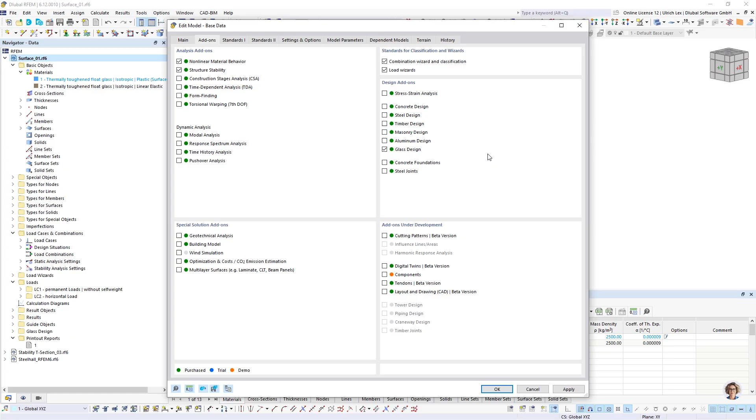So take a look at the base data. Today I have activated the add-on nonlinear material behavior, the structure stability, and for design, the glass design, because it's created in material glass.

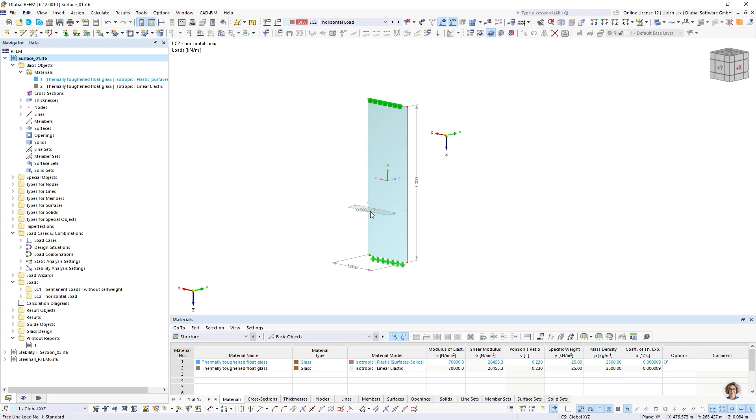So what do I want to do today? I have this system supported in the upper line and downside, and I have two different load cases. One load I created as a permanent load. It's located in the upper line, and the other load is a horizontal load, maybe from people or anything else.

So what I want to do today is to look how much I can increase the load so that the stability is given for this system. Here I can easily use the add-on Structure Stability. So, one short look back to the theory.

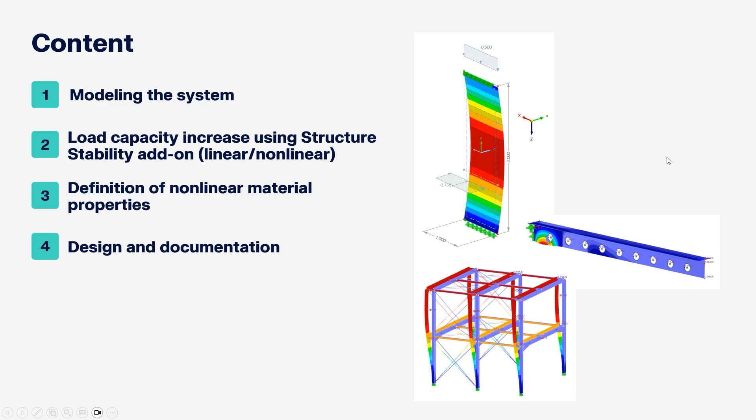Because we can do this also in the theory. I can compute here my critical buckling load, maybe also with formulas. As I told you, the height or length of the system is 3 meters, the width is 1 meter, the thickness of the surface is 12 millimeters. Material is glass, and the E-modulus is 70,000 Newton per square millimeter.

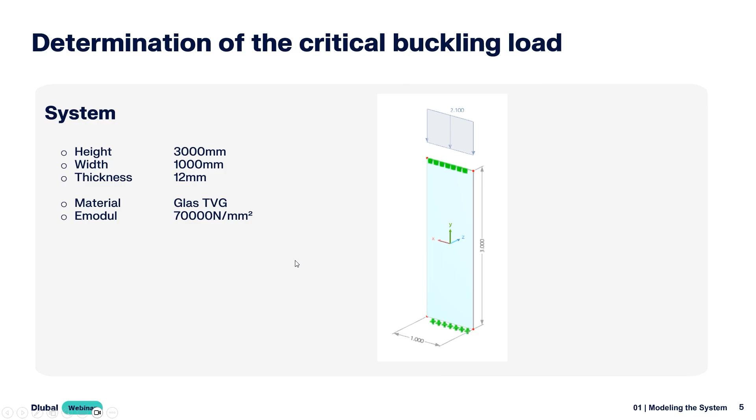So when we take a look at the formulas, we can use the Euler formula. It's called Fk equals pi squared multiplied with the E-modulus, divided by the buckling length squared. In our case it's a pendulum. It's case 2, where the buckling length equals the length of the system.

So when we fill the values in the formula, we get a theoretical critical buckling load of 11.05 kilonewton. This can be easily checked with RFEM too. So go back to the program.

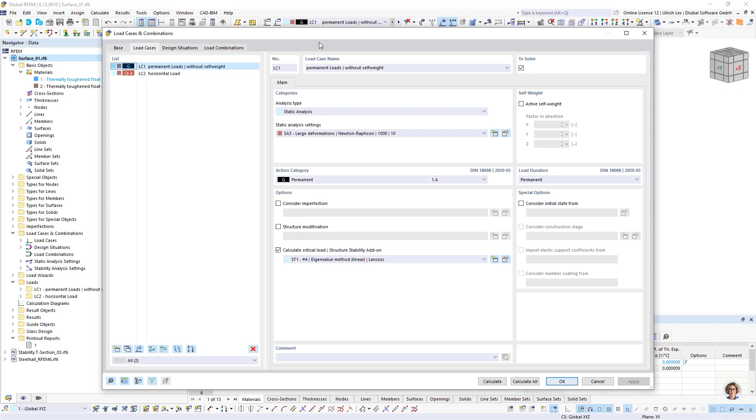How can we do the settings? If the stability analysis is checked on in the base data, then you get a new entry in load cases and combinations for the stability analysis settings. Here you can find these settings. You can also assign it directly to a load case or even to a load combination. It's possible for all load cases and combinations.

Here I can check on the structure stability add-on and create new settings for it. When I create a new setting, I have the possibility to use different analysis types. On the one side, the eigenvalue method, or for nonlinear things, the incremental method with or without eigenvalue analysis. In the first step, I want to use the eigenvalue method.

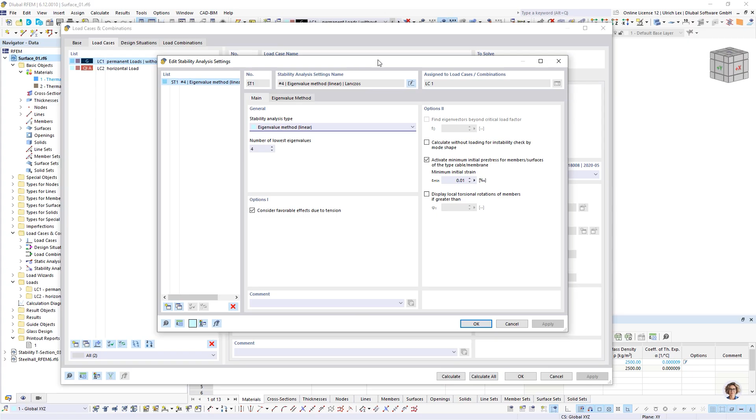And here in the settings I have the possibility to use different methods. You can find in the manual what is the best setting. So this is all I have to do in the settings. I can continue with OK. I want to use the permanent loads. It's without self-weight, so that I can compare it better with my analytical solution.

If we have checked this on, we can calculate the first load case. So you see in the calculation dialog that at first the load case is computed, and as a second step the stability analysis is done.

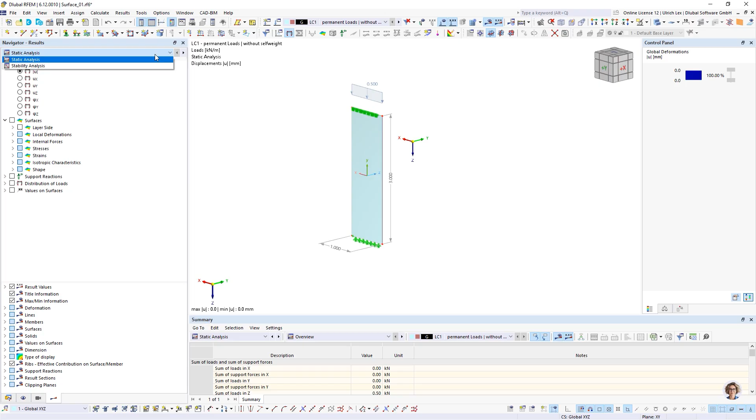You find the results are not here in the dialog on the upper side. You find the results on the navigator, one time the static analysis results, and if you click, you can choose the stability analysis results. The same is in the result table. Here you have the results for static analysis and stability analysis.

So when we take a look at the results, we find critical load factors. The critical load factor means the factor how much I can increase the given load until the system gets unstable. In our case, the first critical load factor is 22.264, and with this factor, I want to switch to my PowerPoint.

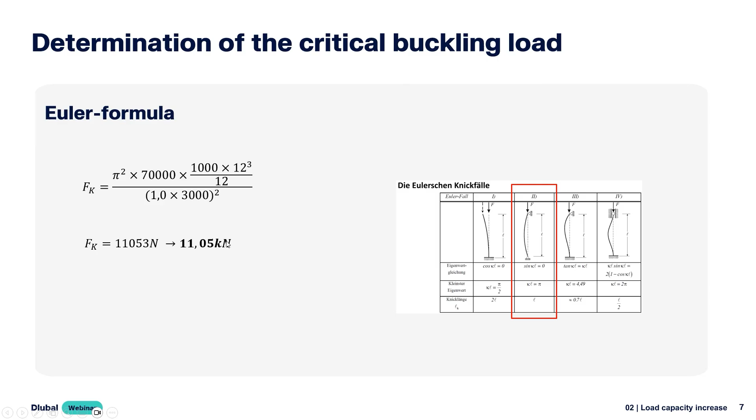So manually, we computed 11.05 kilonewton. What does RFEM do? With RFEM, we computed a critical load factor of 22.264. Our load was 0.5. That means I get a critical load, a critical buckling load of 11.13 kilonewton. So we see it's nearly the same as the formulas. And in this way, we can check the results of RFEM.

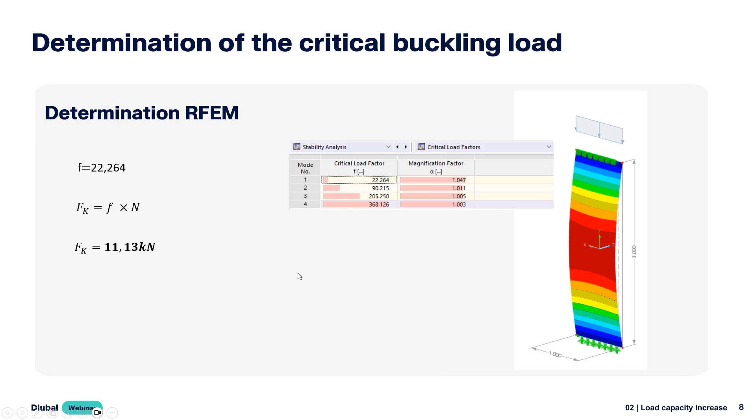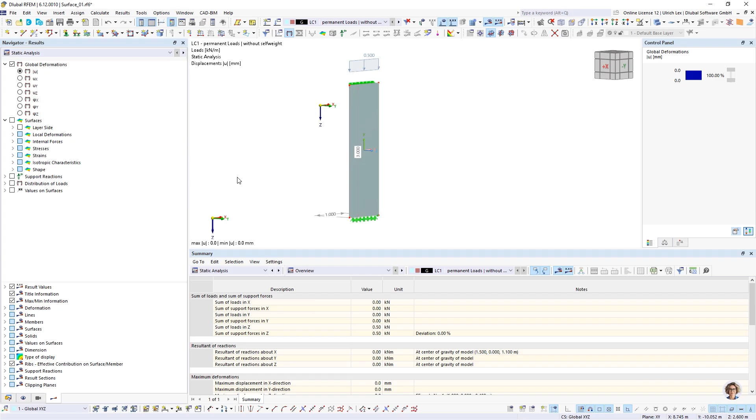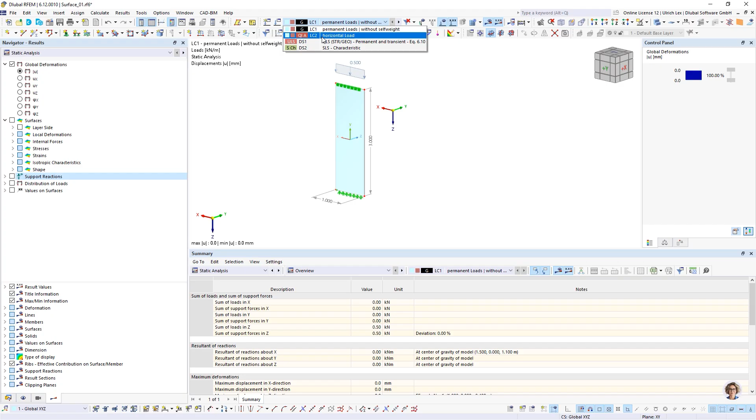Okay. So the load itself we can also show. I'll show you later the support reactions. Okay. Now we have done the eigenvalue. So as the second part, I can increase this load because I want to know how much I can increase my load with the vertical load and the horizontal load. How can I do this?

Before I do this, one topic: I use here for the analysis settings the large deformation calculation, because it's a special thing for glass. For the large deformation analysis, the membrane stiffness of the surfaces is activated. This is important for thin surfaces. With bending, it's not so important, but here it's important to get the system stable, because here the normal forces are acting also for the bending moment.

You have to know it, because when we increase now the load for the horizontal and the vertical situation, then it happens that the system gets big normal forces, and it's caused by the large deformation analysis. So okay, when we now want to take a look at both load cases, we create a new load combination. I use here also large deformation analysis. I assign my permanent loads and my horizontal load. I can check on the structure stability.

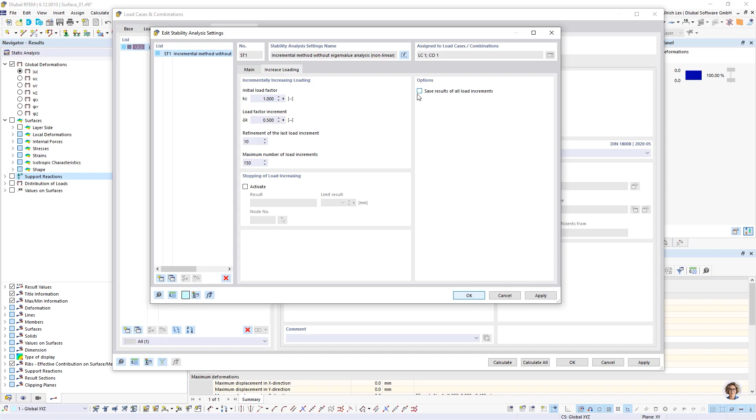The refinement of the last step is when the program finds the maximum load, then it goes one step back and does the steps with refinement to get more exact results. One important option is here on the right side. You can save the results for all increments. If you do not check this setting, then you get only the last load step. If you have checked it, you can take a look at each load step the program computes. So with this setting, I can continue with OK and compute my load combination.

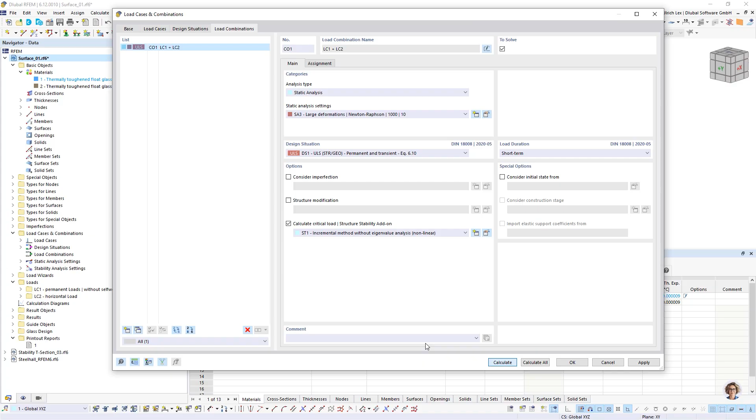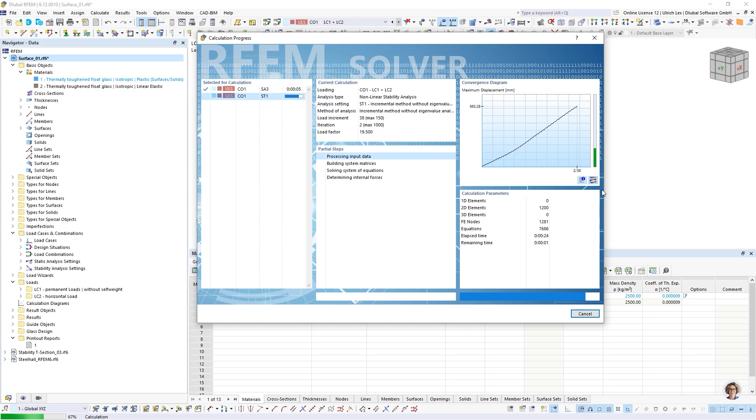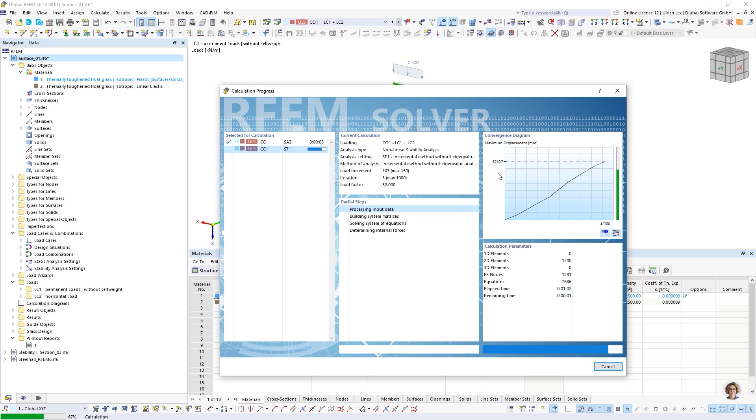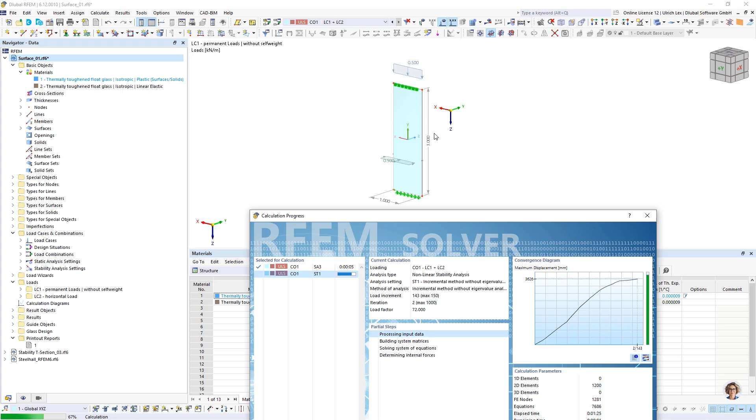Now I'm using a linear elastic material and use both loads. As I said before, the static analysis is done, and as a second part, the stability analysis. Here you can take a look at the deformation in each increment and at the calculation. Okay, we see the displacement gets higher and higher, and this is what I told before. It's because the large deformation analysis is activated: because of the horizontal load the system is bending, and the membrane forces are acting. So this system is acting in tension and not in bending. This is a special thing for glass structures. It would not happen when the thickness of the surface is bigger.

So now the calculation stops, and we will take a look at the results. We can see that the calculation stops in increment 150. We get a message that this is the load factor when the maximum number of increments is reached, from the setting before. That means the calculation is not really finished, because if I allow more increments, the program will compute more. For our case, it's okay, because when I look at the deformation in increment 150, I have about 3 meters deformation.

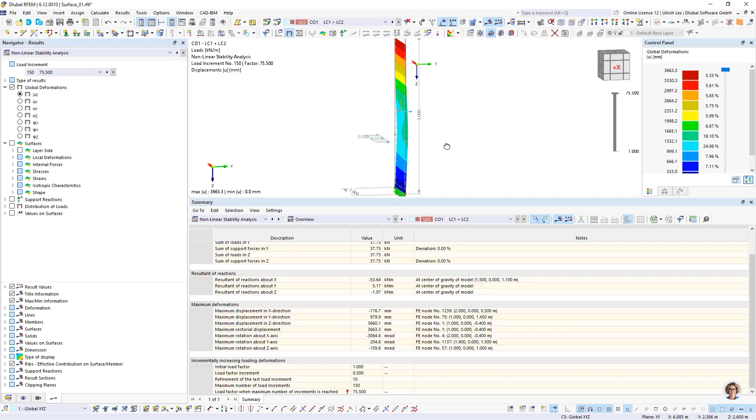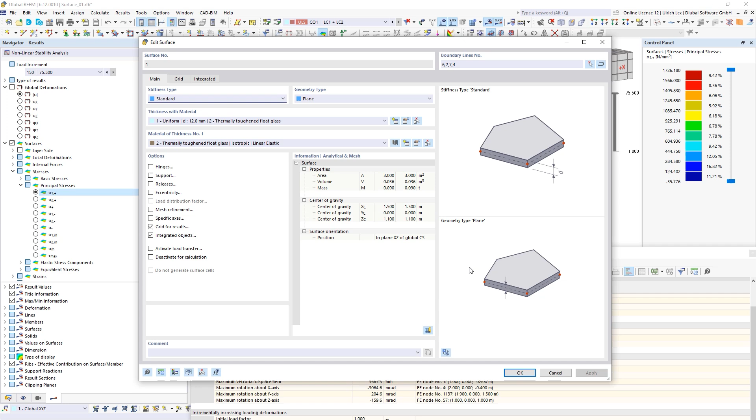So it's not usable in this case. But what I want to show you now is the stresses of the surface. I can take a look at the principal stresses, maybe sigma 1. For this glass, I know the allowable stress is about 80 Newton per square millimeter for a thermally toughened float glass. So now I can take a look at the stresses in each load step. I can scroll down and see my maximum stress is 80. I'm here on 6.56.

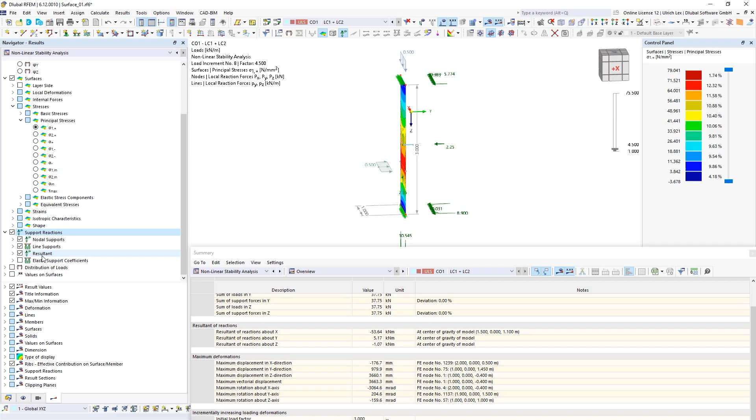Here at load step 4.5, I reached a maximum stress of 80 Newton per square millimeters. And now I can take a look at the support reactions. When I take a look at the resultant, we can see that the vertical load and the horizontal load are increased in the same way. So my original load 0.5 and the load factor 4.5 give a vertical load of 2.25 kilonewtons.

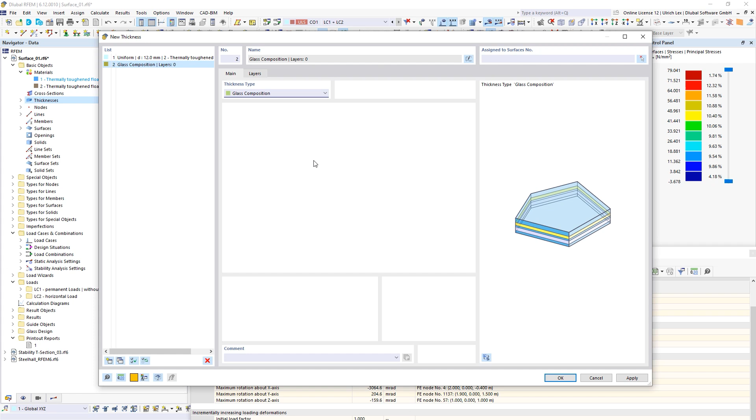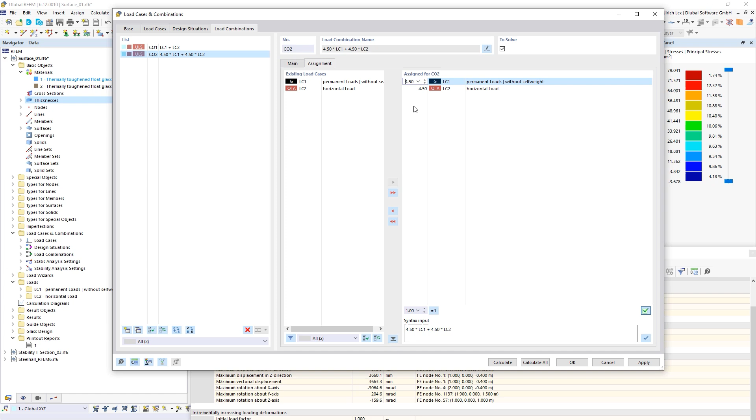So now I can do a simple check. I can create a glass surface, maybe a new thickness, as glass composition. I'm using the same thickness. It's only to be able to design it. I create a new load combination with the load factor 4.5. Okay, and now I can design this structure with the load of 4.5.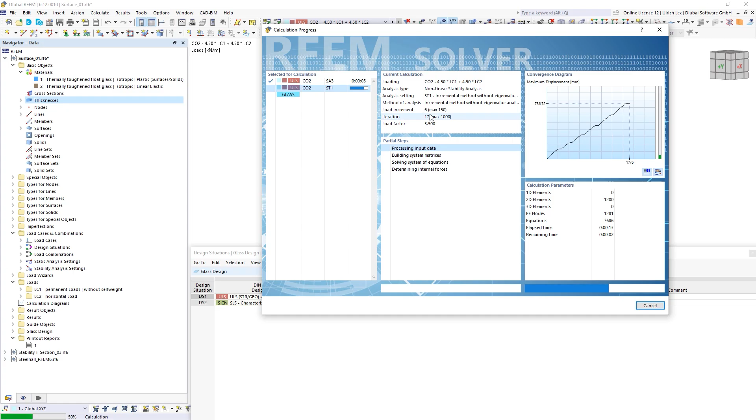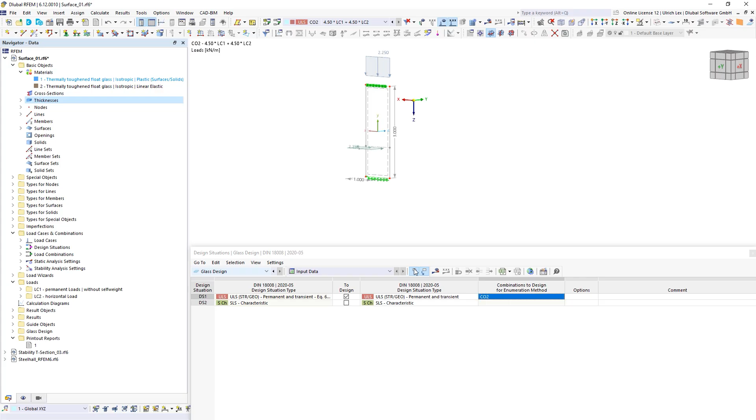When we are right, then we should have... I did the stability analysis again. It's not needed. But okay, I can stop it here. Yes. Okay, and deactivate it. And run the calculation again. Then there's no stability analysis. So when the calculation is ready, we see that the design ratio is nearly 100%.

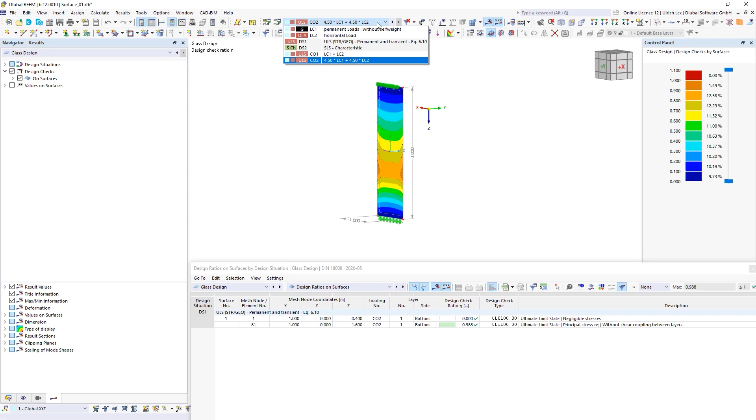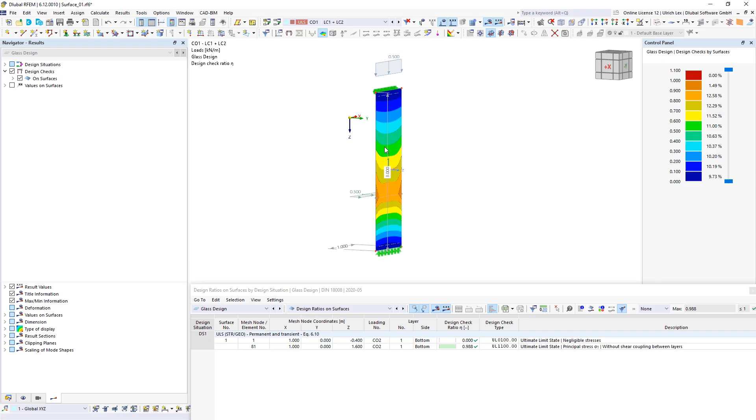So this is an easy way to find how much I can increase the load for this system. So now we increased the horizontal and the vertical loads in the same way. This is maybe not the case, or not needed each time. Maybe it's needed that I only increase the vertical load, or only the horizontal load, and this also can be done with the add-on.

The second part I want to change is the nonlinear material behavior. I assign at first my thickness of 12 millimeters and use the nonlinear material. For the nonlinear material, I created also a material type class. I use the isotropic plastic material model, and I used the stress failure hypothesis of Drucker-Prager. The most known would be von Mises, but with von Mises I can set only one value for tension and compression strength. With Drucker-Prager, I can define two different values for compression and tension.

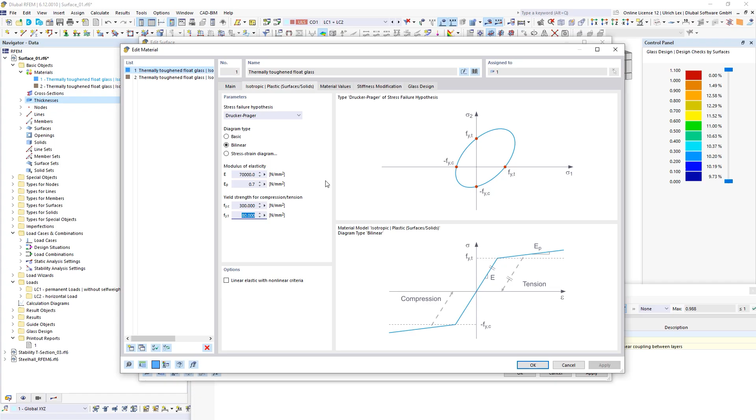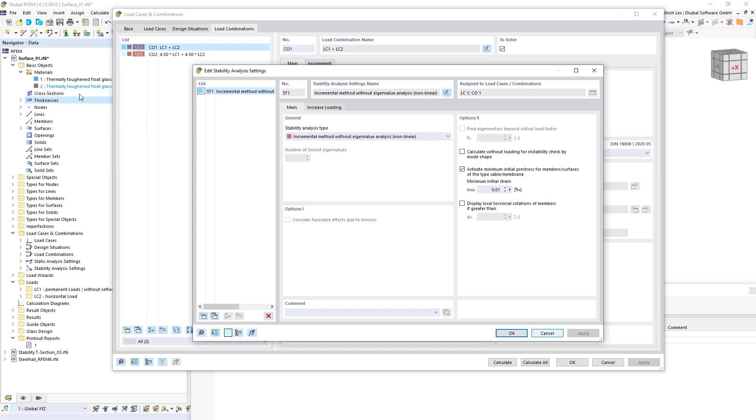The glass material has a very high compression yield strength, so I set 300, and for the tension, as I said before, I used the 80 Newton per square millimeters. So when I define this and use the stability analysis, the add-on increases the load until the point where the 80 Newton per square millimeters strength is reached, and then the calculation is stopped. Of course, we have to think about whether my material really has a plastic behavior or not. But I think it's a good way to get a feeling for how much I can increase my load.

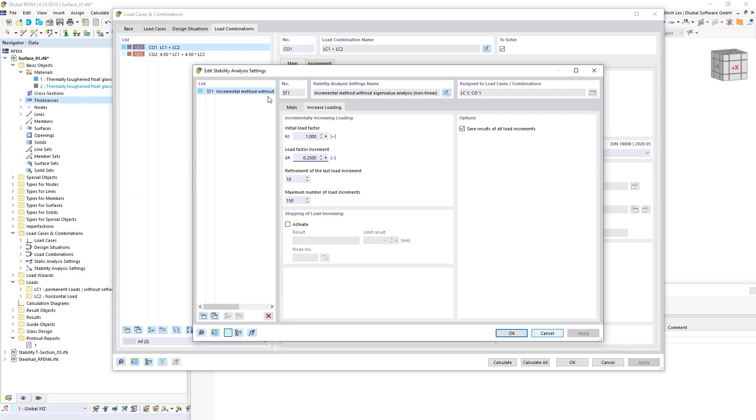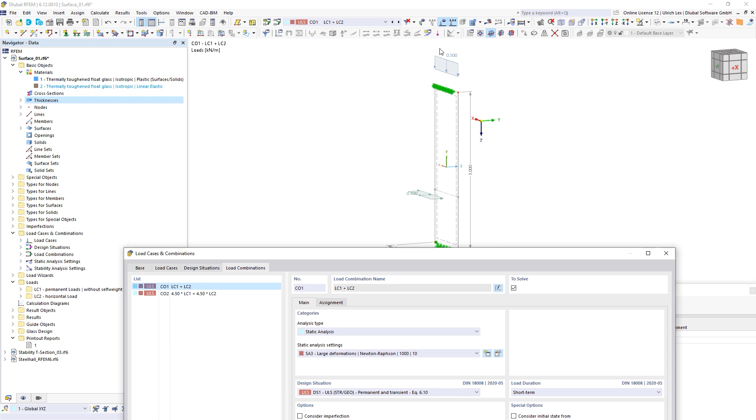I can do it a little bit finer, I would say. Okay, and now the settings are done. As a second step, I want to show you that I only want to increase my vertical load and keep my horizontal load fixed. I can do it when I use the initial state. Here I use load case 1 and load case 2, and as my initial state load case 2 should act. That means my load case 2 is always on the same level, and I increase only my load case 1.

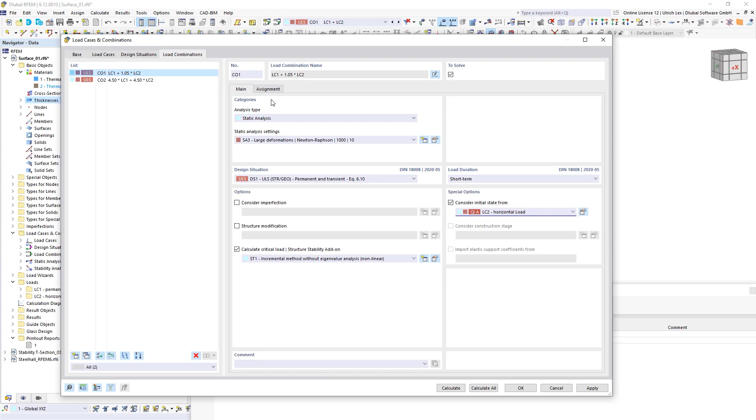You have to be careful because the load case 2 used here for the initial state has to be the same as the assigned load case. When I use any load factor here, then I would have to create a new load combination where I have this load factor too. But in our case, I use 1.0, so it's okay. So what happens when I now compute this?

In the calculation dialog, you see at first load case 2 is computed, then the combination: the static analysis for load case 2, the static analysis for the combination, and after that the stability analysis of combination 1 is done. So now we see the calculation is running and the calculation stops before our 150 increments.

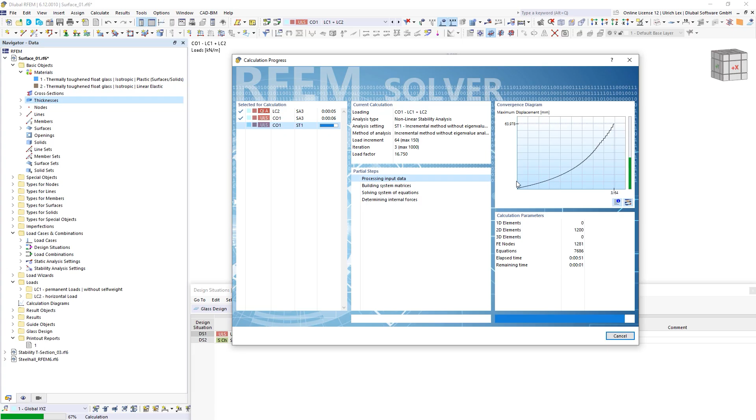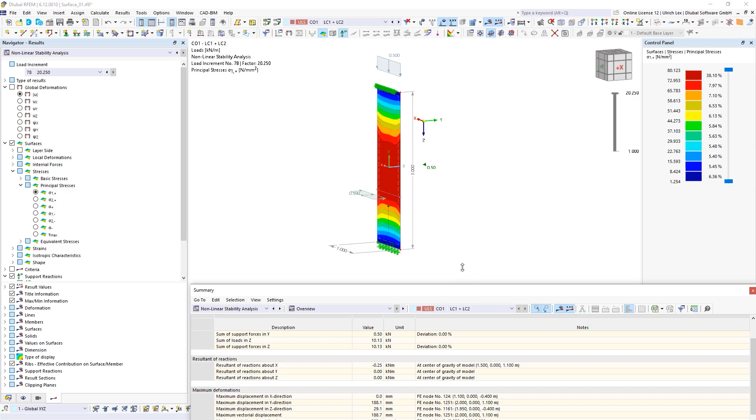So now the calculation stops at about a load factor of 20, and when we check the stresses, then it is exactly the stress we have set. Here the stress is 80, a little bit higher, because the nonlinear setting uses equivalent stresses for checking the results, so it's a little bit higher. But I think for what we want to do, it's enough.

So now, what does this result say? The results say, okay, we can increase the load about 20 times before a collapse of the system is given. When we now take a look at the support reactions, we can see that the horizontal load is the same with 0.5, and only our vertical load is increased about this 20 times.

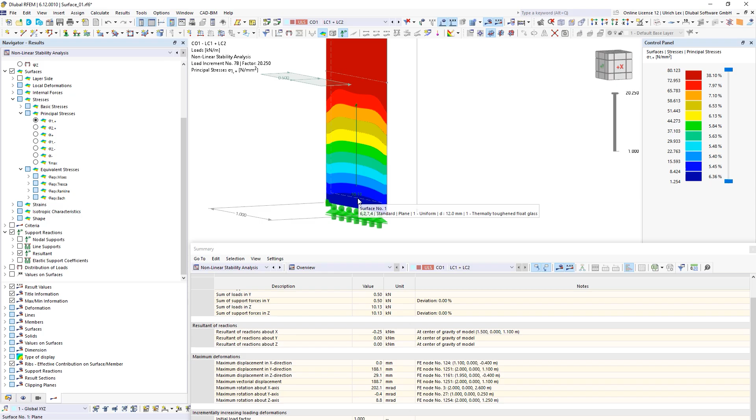So this is a possibility. You can check how much you can increase this load. You can do the same in the same way for the horizontal load. You can say, okay, my vertical load is fixed, and I only want to increase my horizontal load until the system is unstable.

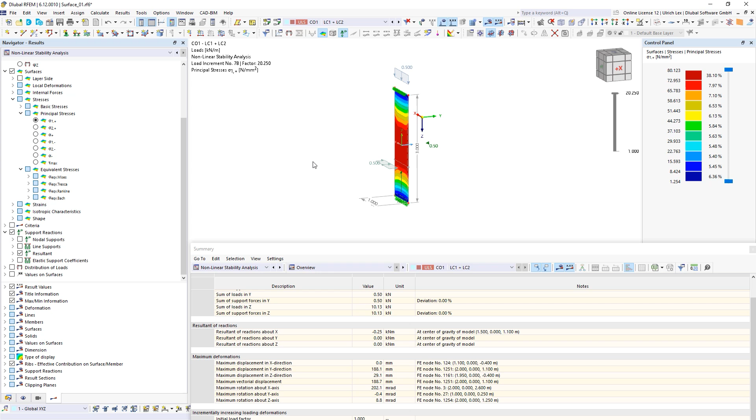So as a last step, I want to take a look at the deformations. The stresses maybe would be okay for a design, but the deformations are about 190 millimeters. It's quite high, I think. So what can we do in the stability add-on? We can say, okay, stop the calculation when a wished height of displacement is reached.

So we have here a length of maybe 3 meters. When I say, okay, 3000 divided by 100, it's about 30 millimeters, where I can allow the deformations. And this setting we can do in the same way here for increasing loads. We can activate the stopping of load increasing. We can use here the deformation in the different directions.

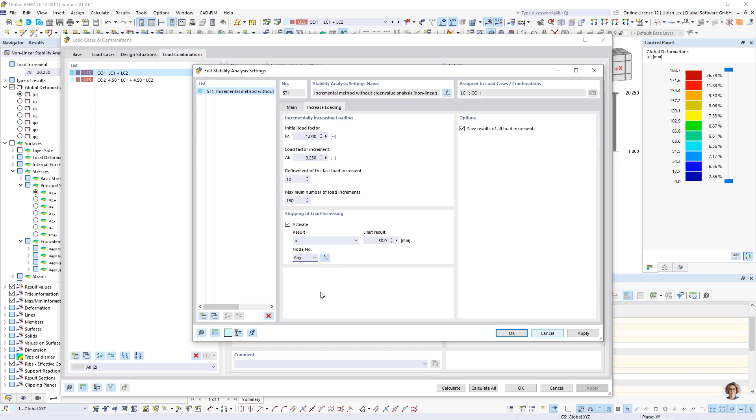And we can define a value. Maybe I define here 30 millimeters and can say, okay, one exact node has this deformation, or I can say the maximum deformation of the whole system is not bigger than this value. When I continue with OK, we can see that the calculation is running and the calculation should stop at 30 millimeters.

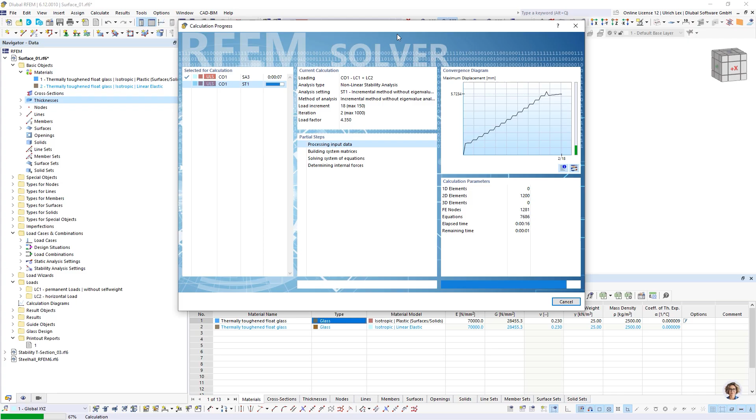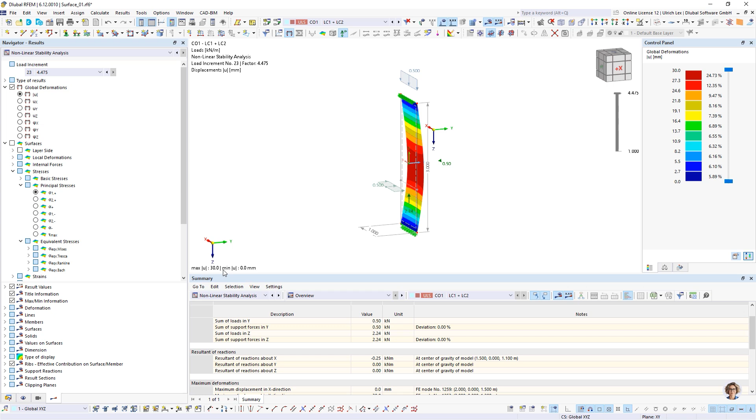So when I take a look at the results, I see that my load factor is 4.4. Here I get a deformation of maximum 30 millimeters. And my stresses are even smaller. So with these settings, you can find out how much the load increasing can be done. So now I want to stop here and switch to a second example I've prepared.

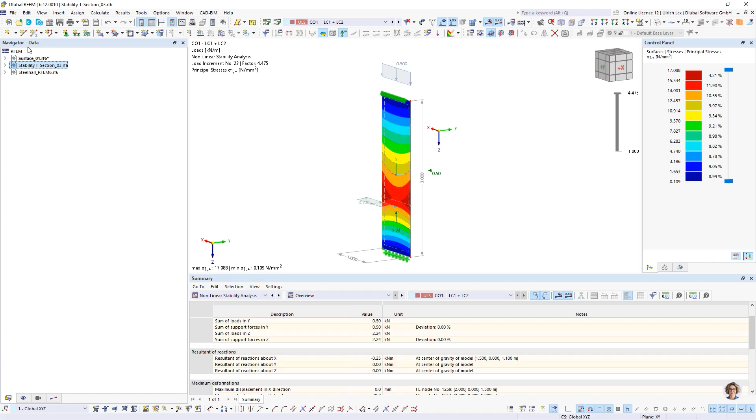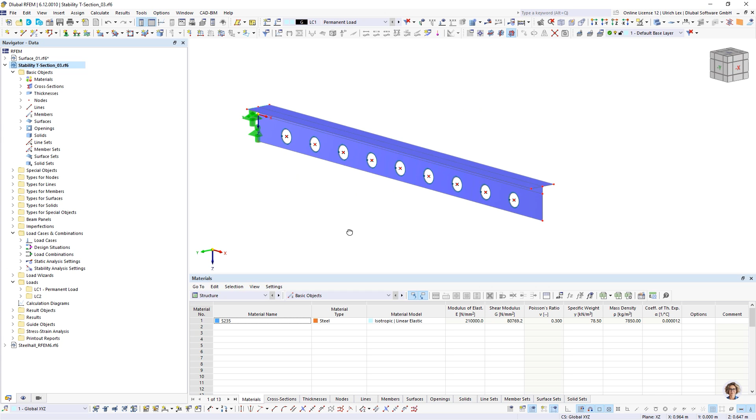It's an analysis of a section, of a T section. This T section is created as surfaces, as two surfaces. A special thing of these sections are these openings, these holes. And here I want to do a design and also a stability check for it. So we have on the one side the loads, a permanent load, and in this case a snow load.

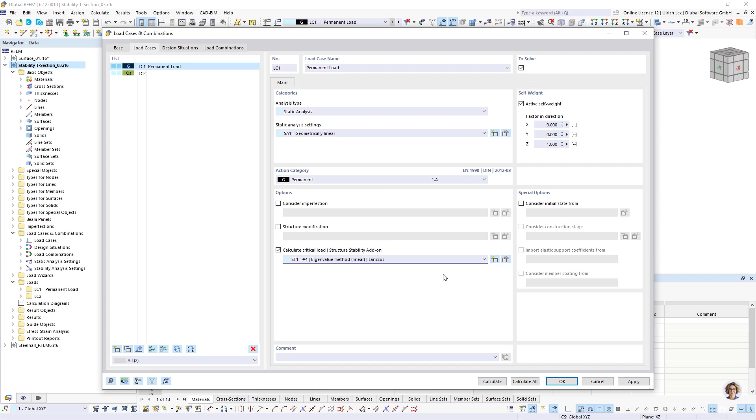Now I can also activate here a stability analysis, and I want to get also the eigenvalue method with the same settings as before or with the default settings, and compute this eigenvalue for this cross section.

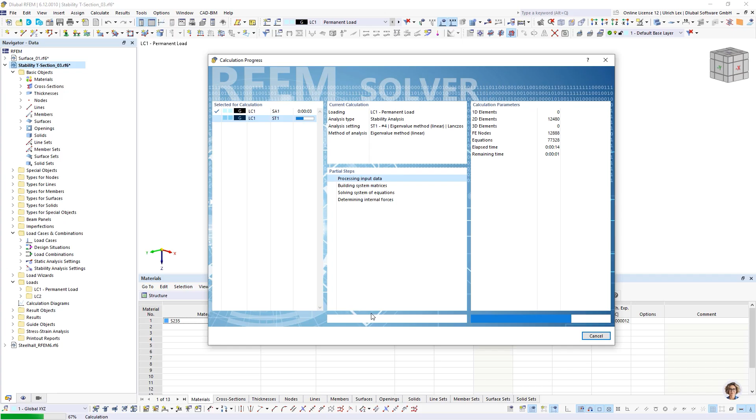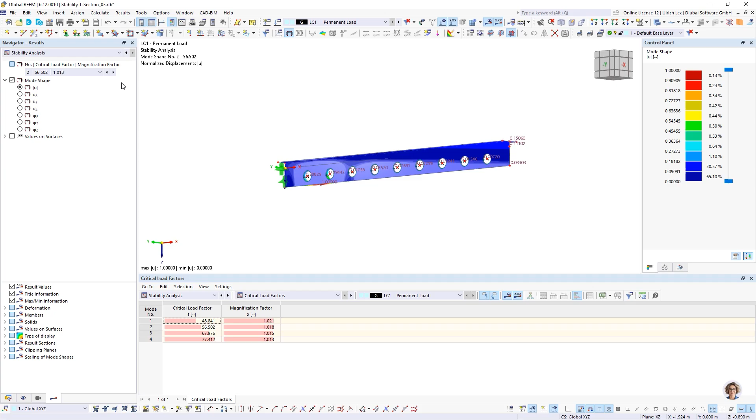So what are the results now? For the results I get also the critical load factors, and I get the different eigenforms for these systems. When we take a look at the second eigenform, it's a buckling on the second part. The first eigenform is the buckling on the first part, and so on. So this eigenform we can now use for a design of this section.

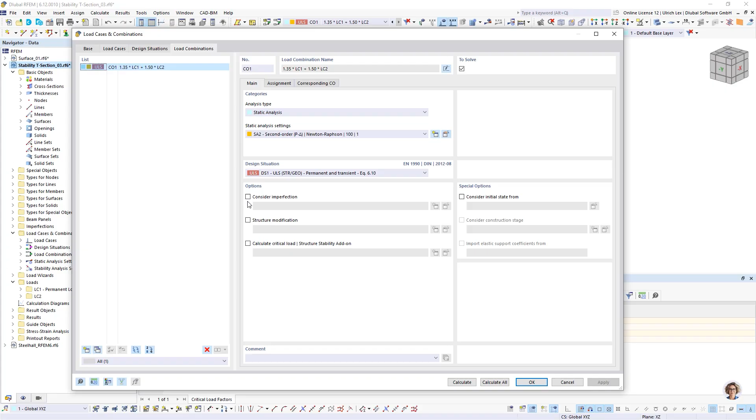When we want to design the load combination, then we can do it here. We can consider an imperfection. We have to create a new imperfection. We have to choose here maybe the buckling mode. I want to select a load case. I want to use the buckling mode from load case 1. And here, as we saw before, the eigenform 1 we want to use.

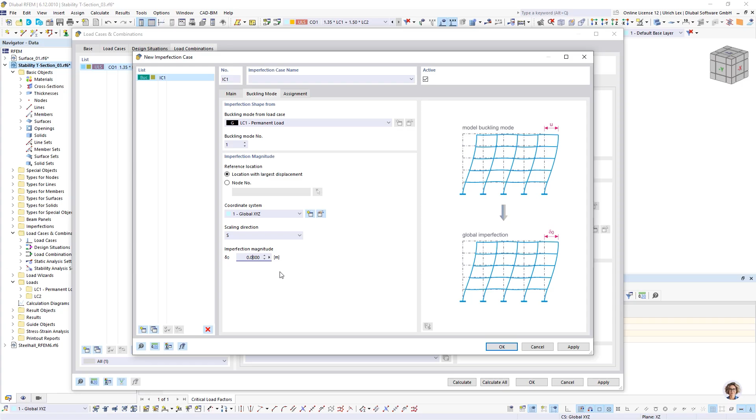Here I have to say how the scaling of the imperfection is. I can say, okay, it's in direction of the eigenform, and I want to define a height of the imperfection. That means when I go back to my load case 1, I got this eigenform, and I say now for load combination 1, it should use this form as an imperfection, and the value of 3 centimeters, 30 millimeters, should be here at this point. And the rest of the points are scaling automatically.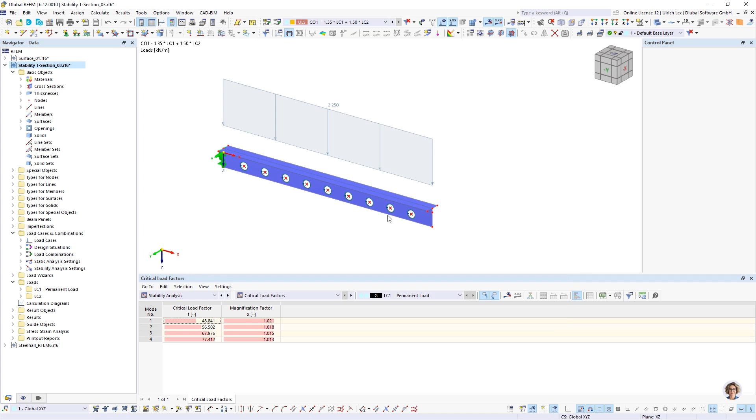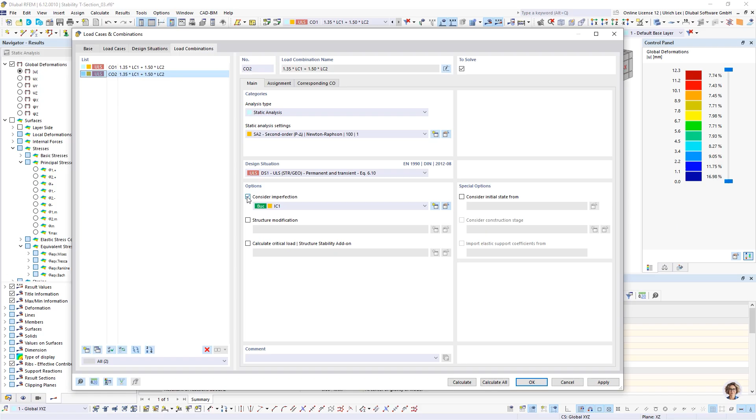So when I did these settings, I can compute the combination again. And we see at the deformation that this curve of the imperfection is assigned. To compare briefly, I can create a second combination where I do not use the imperfection. Here I get much lower deformations and much lower stresses.

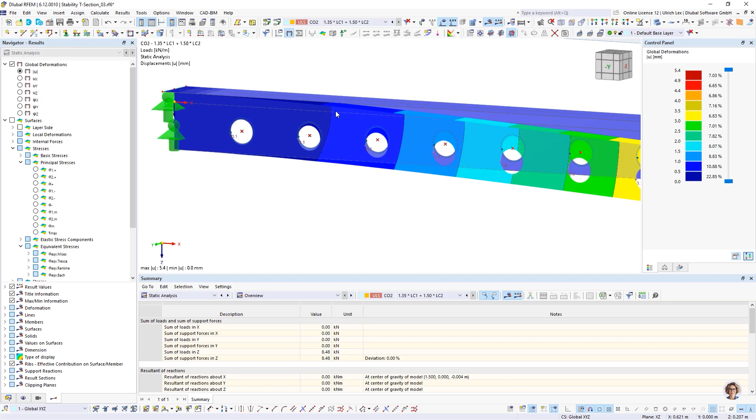So exactly here you have the perfect form. And in the first case, you can easily consider these local imperfections for the system. So this is a good point how you can use this stability analysis.

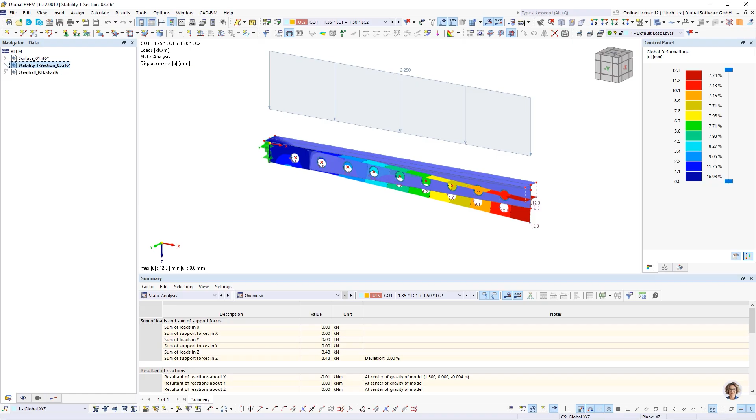As the third part, I want to show you something for members. I created here a steel hall with permanent loading and imposed loading and so on. But my problem now is that I get an instability when I compute even the permanent loading.

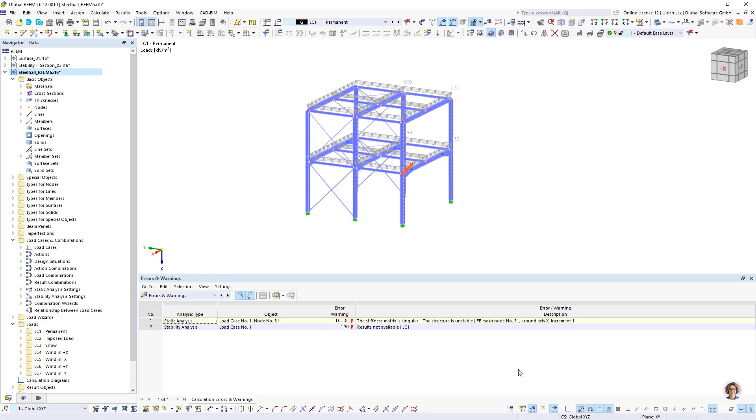So this can happen when I do a bigger modeling and so on. I get this error message. The calculation says the stiffness matrix is singular, it's unstable on this point. When I take a look at this point, it seems everything is okay.

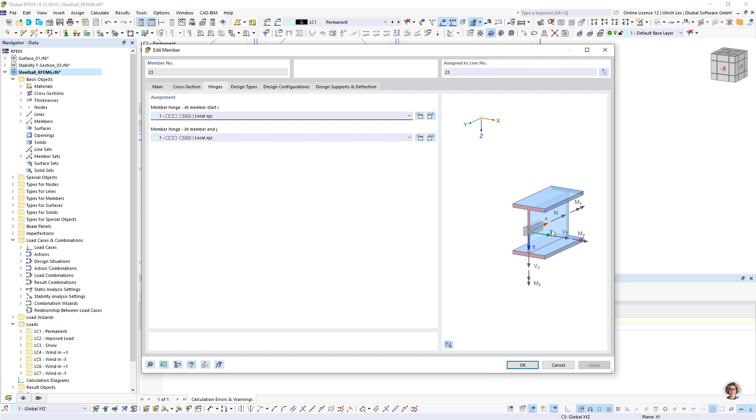Here I have maybe hinges. It's a member type beam, okay, with hinges, but the hinges are around Z and Y, so it should be okay. And for this case, I can also use the stability add-on.

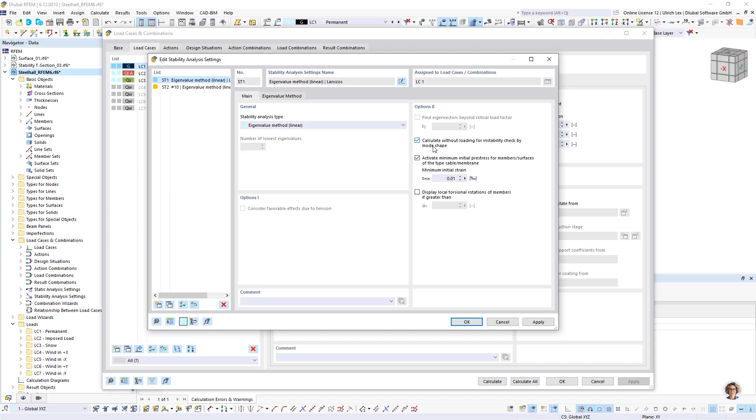I can here create a new setting where I say, okay, I use the eigenvalue method and I want to calculate it without loading to check the mode shape. When I check on this and run the calculation again, then I get results for a geometric instability of the system.

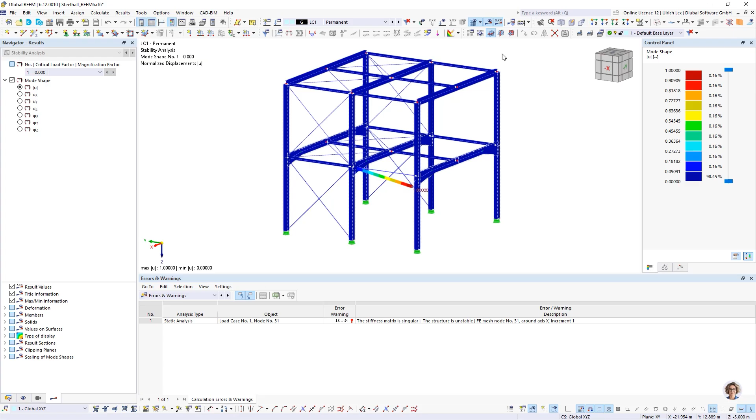I would say for this easy system, it's easier to find the instability. When the system gets bigger and bigger, it's more difficult. And here this option is very good, because now I see, okay, on this point there is the instability. It looks like this member is not connected to my column, and I can check it afterwards.

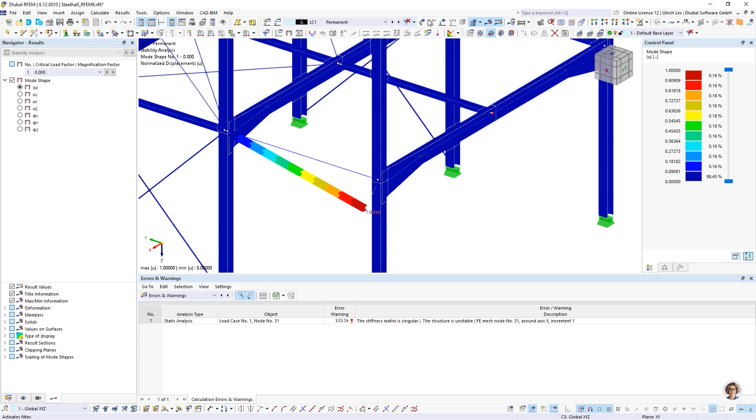I can check it when I zoom in, and I see, okay, my nodes are not connected. Here I have a gap of about 1 centimeter. And this is the reason for the instability. So I can connect it easily. And after that, the calculation is running.

So what can I do now? I can check it off here, because now the calculation is running. So here we have the option to define the number of lowest eigenvalues. Sometimes it's needed to increase this value. The default setting is 4. Sometimes it's needed, and we can see what happens when we increase it.

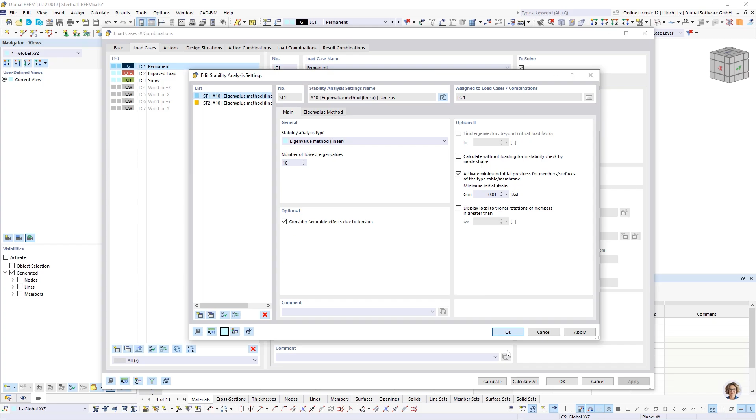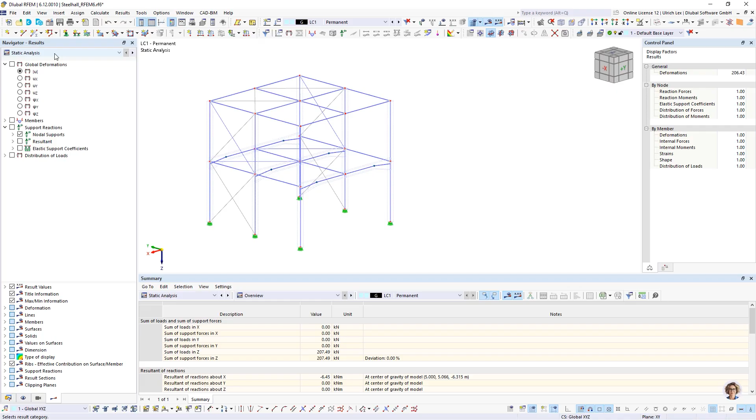I can compute it. Then more eigenvalues are computed. And we see it's sometimes important, because sometimes we have some local eigenforms

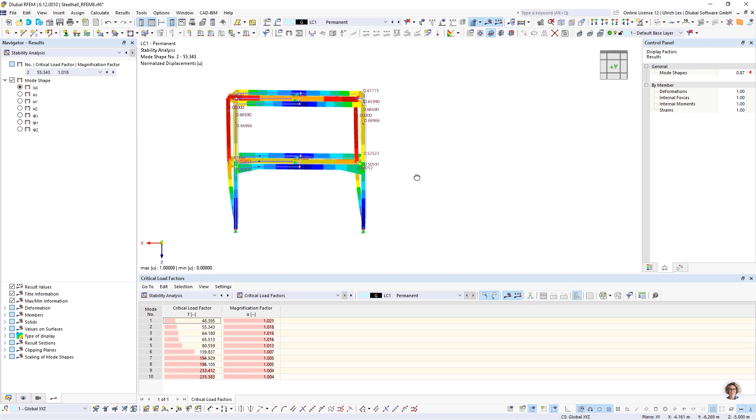for local members, I would say, and the second eigenform would maybe be a global eigenform for this system in x direction, and the third eigenform would maybe be a global one in y direction. And when I want to look at a different member, I have to take a look at other eigenforms.

These values I can also use as buckling lengths, maybe to design the separate members and so on. So for this case, it is sensible to increase this number of eigenforms.